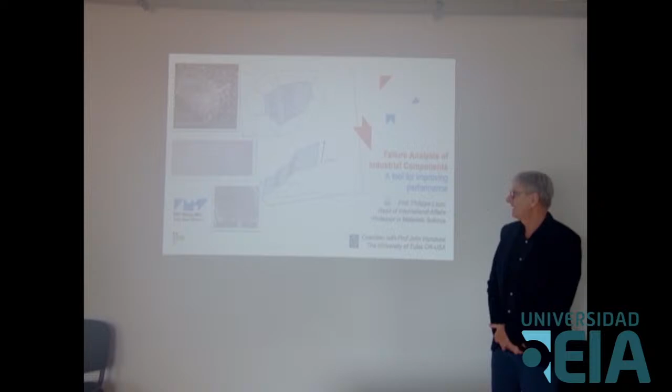I will do some lectures for students, and talk about our research activities tomorrow. Today I will give a general talk about failure analysis. This is a talk I prepared together with my colleague from the University of Tulsa in the USA, Professor John Henshaw, who I would like to thank for providing materials for this talk.

As an introduction, I would say that failure analysis of industrial components is a way to improve performance of parts in industry. We do failure analysis because we have to, because some parts break or fail during service, but also the idea behind this is to improve the parts we manufacture by proposing and recommending corrective actions. So we will go through this agenda.

After a general introduction, we will talk about the reasons why we do failure analysis, discussing statistics, which is very important in failure analysis. Some words about failure reporting, because when we do failure analysis we have to report what we find simply but factually — what we did and what we found — and again here the corrective action we recommend.

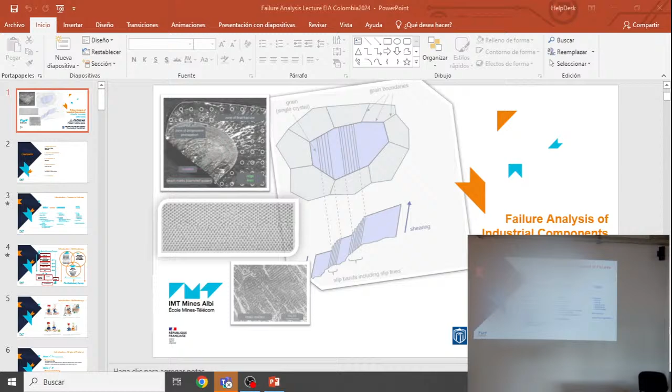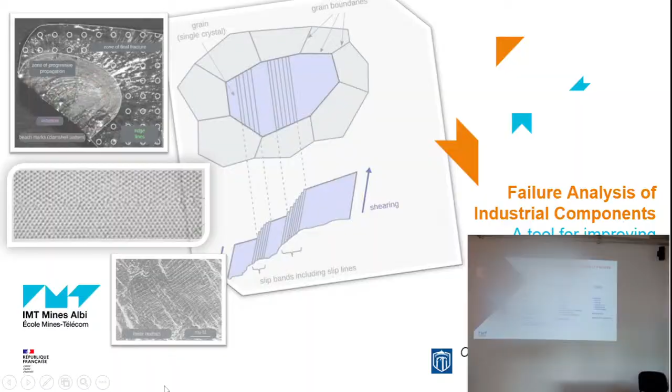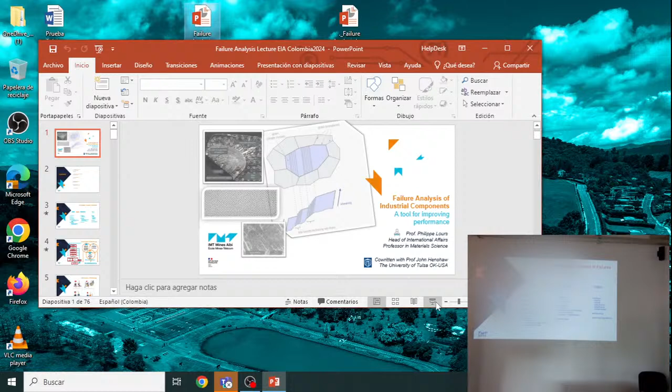People will be connected. Stop. Yeah, you can start again. I can start again? Sí, okay, so sorry for this interruption.

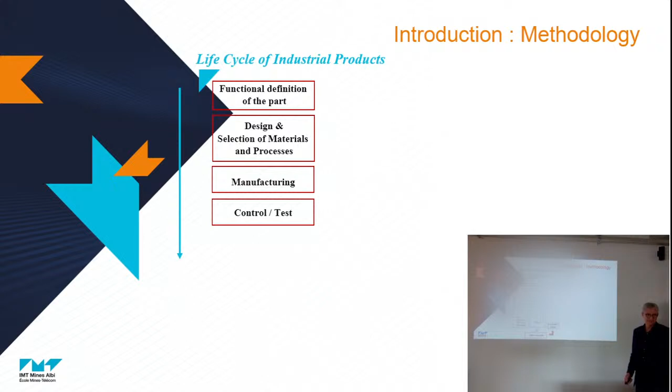I was talking about the different steps where the failure may find the root cause. So either in the design and selection of material and processes, manufacturing, control test, and of course use.

So what we have to do is a preliminary survey. This is what we can do when we have a broken part, and we have to gather general information. We have to look more thoroughly and precisely into the part, and then, if necessary, and only if necessary, we can do complementary exams.

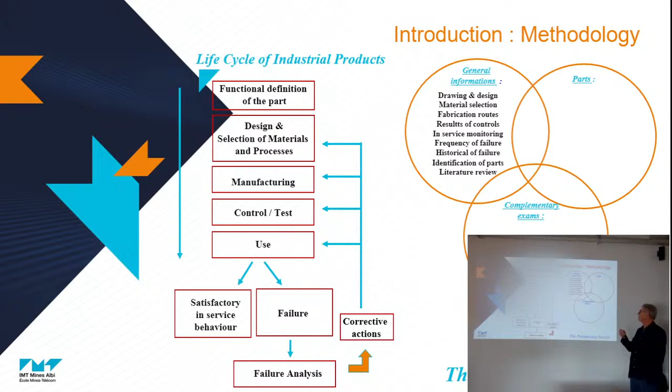So the general information relates to drawing, design, material selection, fabrication routes, results of control, in-service monitoring, frequency of the failure, historical of the failure, identification of part, why not literature review.

We can also make some reconstruction of parts, look to the aspects of the degradation, the fracture surface, and the related specimen fluids counterparts. With this, usually you can have a good idea of what happened, what occurred.

But if you don't understand really and perfectly the failure, you can do complementary tests or complementary exams, like metrology, chemical analysis, non-destructive testing, metallurgical analysis, microfractography, comparative tests, calculation, and simulation.

And when you have done all this, usually you don't do so much investigation, of course, because you don't have anything more to do. But if you do all this, generally speaking, you will have the most likely scenario of the failure.

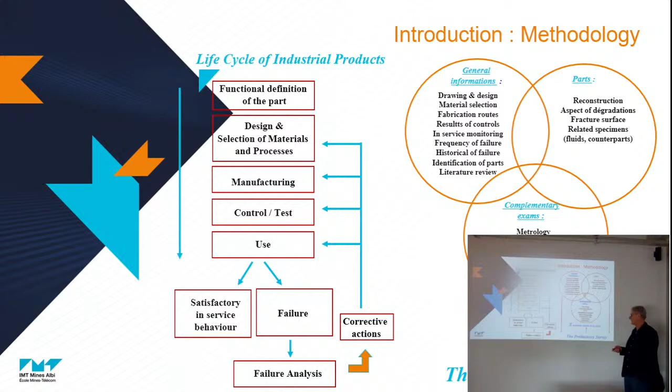The failure analysis is also a question of methodology. You have to be very thorough, and with a part you have to analyze. And this is very important, not to erase the aspects of degradation you have on the surface you are analyzing.

These are also statistics about the cause of failure on 1,000 analyses performed by this French organism. About more than one-third are due to fatigue, less than one-third are due to instantaneous fracture, 20% corrosion, 12% wear and abrasion, and a very low percentage due to in-service deformation without any failure.

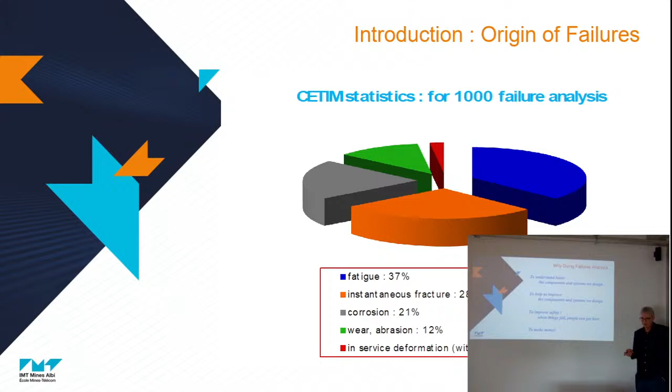So why doing failure analysis? To better understand our system and component, to improve the component and system we design, and also to improve safety. When things fail, people can get hurt. And of course, to save money or to make money, make profits.

So we have to wonder how long should a component last before it fails. Things break and stop working. Why? How long should a component last? This is our main question we have to wonder.

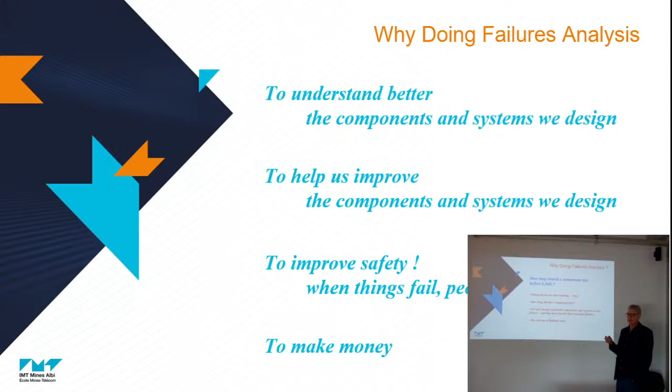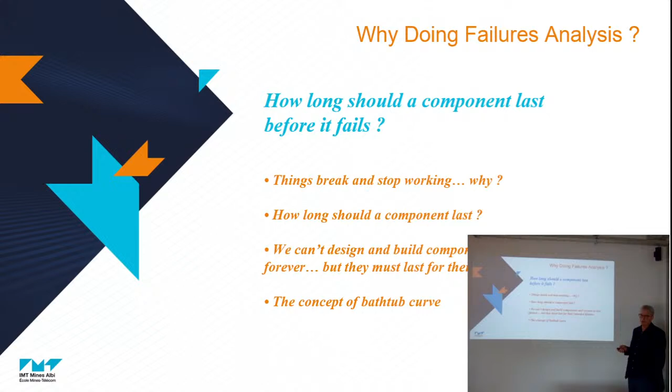We can't design and build components and systems to last forever, but they must last for their intended lifetime. I want to define here the concept of the bathtub curve. This is a curve where you can see, over time, the failure rate.

Usually when you manufacture parts, you have what we call infant mortality failure, early failure of a part due to mismanufacturing. This decreases over time. You also have wear-out failure due to use of material, and random constant failure. When you gather these three curves, you get the bathtub curve.

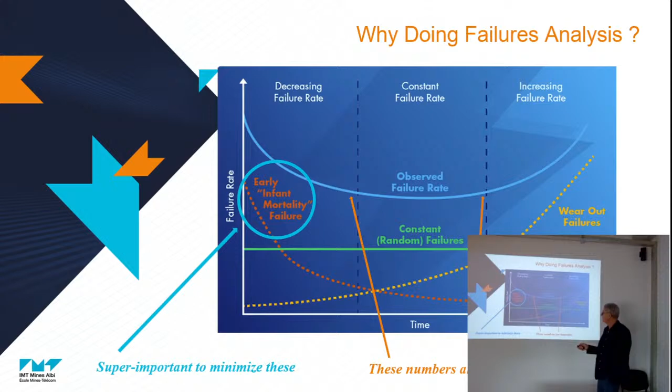It's very important to minimize this time to failure here, and also this number is very important to minimize the infant mortality failure. This is a common way to analyze a mechanism of failure, and when you do a failure analysis, you always have to wonder which part of the bathtub curve you are on.

Example of car tires: infant mortality failures are covered by warranty, very expensive for the manufacturer, usually due to a defective product. This is followed by a long period where failures are very rare. Then finally you have to change your tires because they wear out. So again, when you analyze a failed component, you always have to wonder where on the bathtub curve you are.

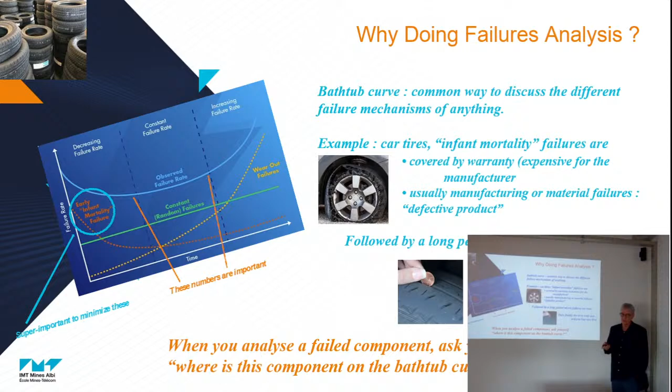It's also very important to do failure analysis and failure statistics. To understand failure, we must track failures over time, analyze each failure to find the root cause, and implement corrective action and projects to eliminate the most prevalent failure.

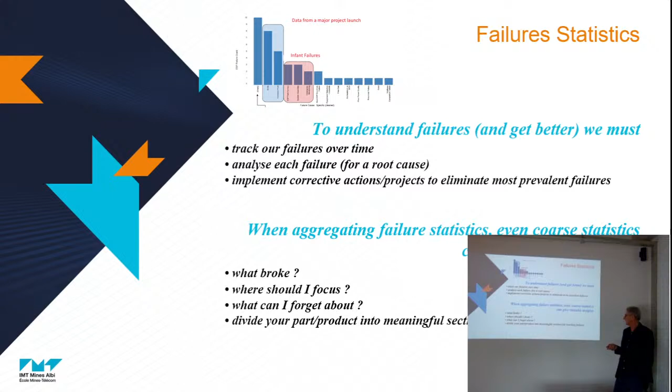When you aggregate failure statistics, even coarse statistics can give very interesting results. What broke? Where should I focus? What can I forget about? And divide the product into meaningful sections for tracking failures. This is very important as well.

Accumulating root cause information over an extended period of time is very important for continuously improving product quality. This helps understand if these are infant or long-term failures, and allows you to justify resources for corrective projects or corrective action.

Usually we use Pareto charts, given that 20% of causes may be the reason for 80% of the failures — this is Pareto analysis. So as a summary, I would say that analysis...

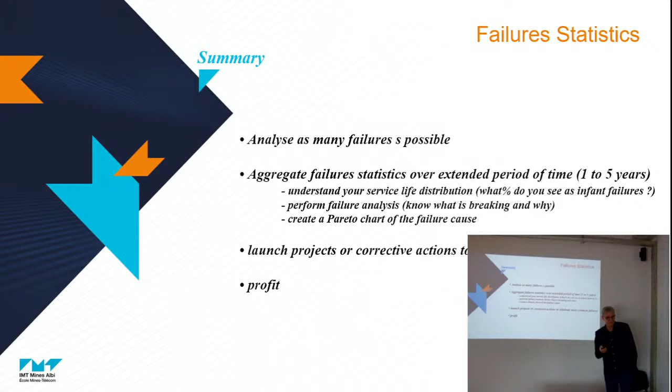You must analyze as many failures as possible, aggregate failure statistics over an extended period of time, let's say 1 to 5 years. Understand your service life distribution, what percentage of infant failure you have, perform failure analysis, and create a Pareto chart for failure cause or root cause. Launch projects for corrective action, and finally get profit in terms of financial benefit.

And you also have to report — this is very important. Failure is always someone's fault and always carries a cost, so you need to defend your conclusions. People can get hurt during failure; there are legal consequences and financial consequences. So you have to be complete, without any immaterial conclusion or evidence.

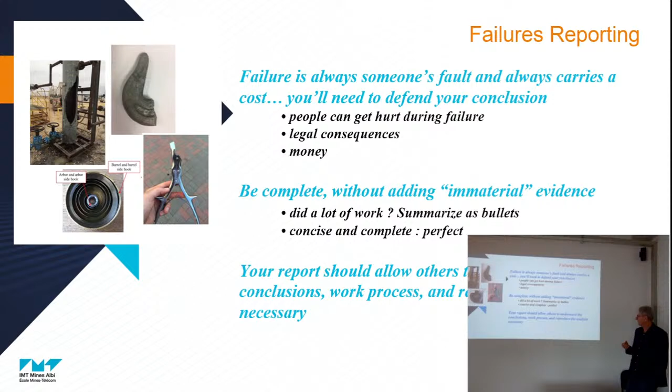You need a lot of work, of course, to do a failure analysis, so summarize it in bullet points. Be concise and complete, and your report should allow others to understand the conclusion, the work process, and reproduce the analysis if necessary.

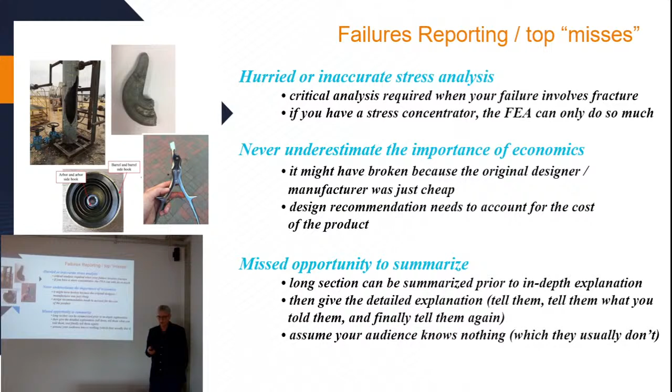These are the main top mistakes in failure analysis reports: hurried or inaccurate stress analysis, never underestimating the importance of economics, and missed opportunities to summarize. It's very important to go through these different points when you do a failure analysis report.

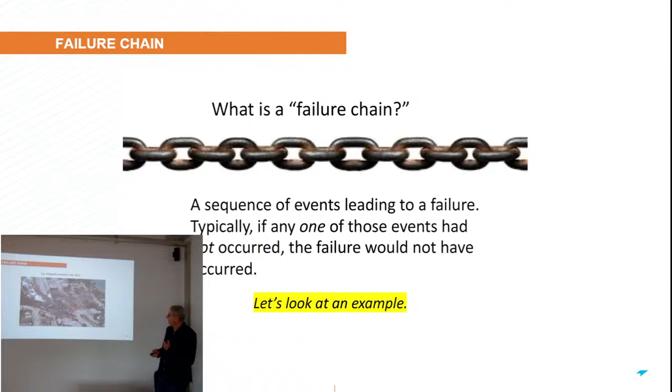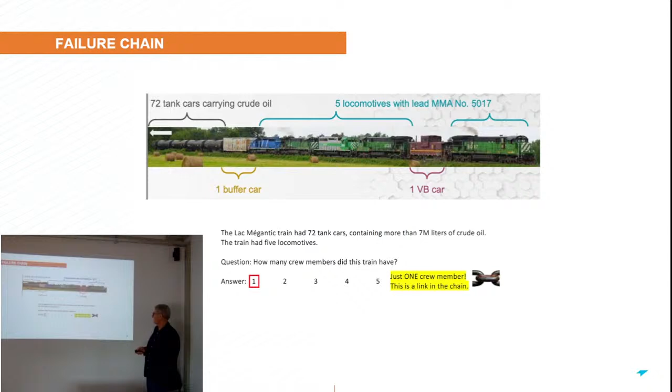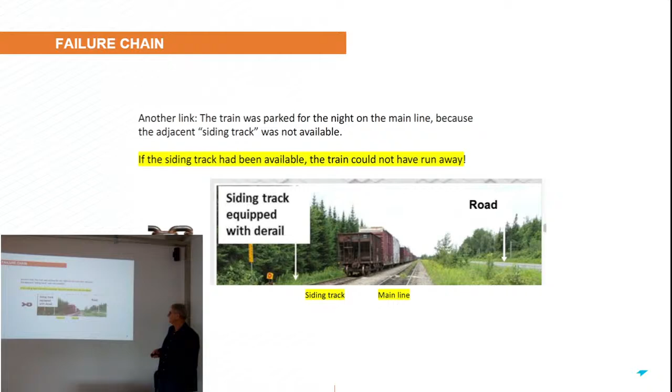Another link: to park the cars during the night, we should have used a siding track and not the main line. But in this case, the siding track equipped with a derail system was not available, so the train was kept on the main line. This is the second link.

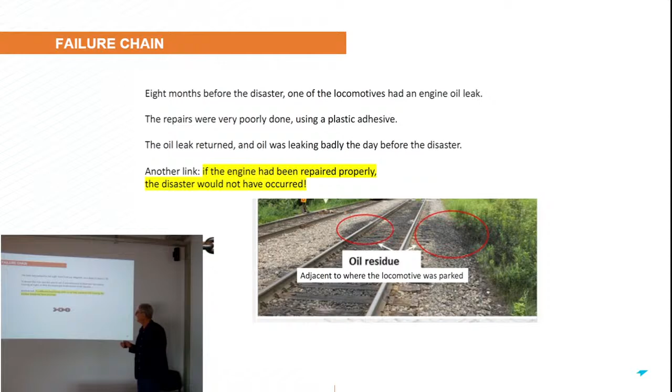The train was parked 15 kilometers from Lac Mégantic on a slope of about 0.7%. So to ensure the train would not roll, it was necessary to leave one locomotive running all night, so that the pneumatic brake system could operate.

The locomotive used was the locomotive with the oil leak. This is another link in the chain - if a different locomotive had been used, maybe there would have been no problem.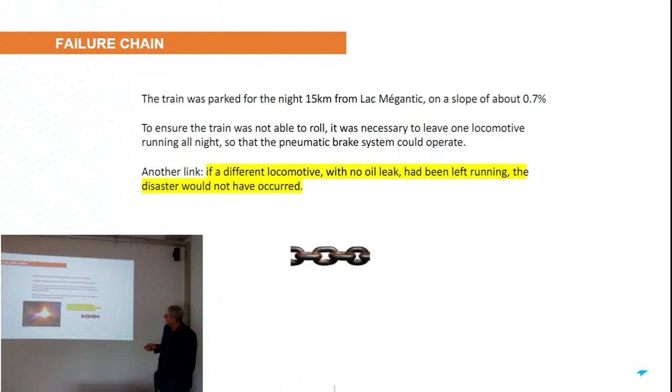So in the middle of the night, due to the oil leak, a fire caught near midnight. Firefighters extinguished the blaze after first shutting down the locomotive.

But they did not restart the engine of that locomotive or another one. So no more pneumatic brake was available.

And here we come back to the only one person in charge of the project, of the program of the train. This person had to manually put in operation the brakes of all the wagons.

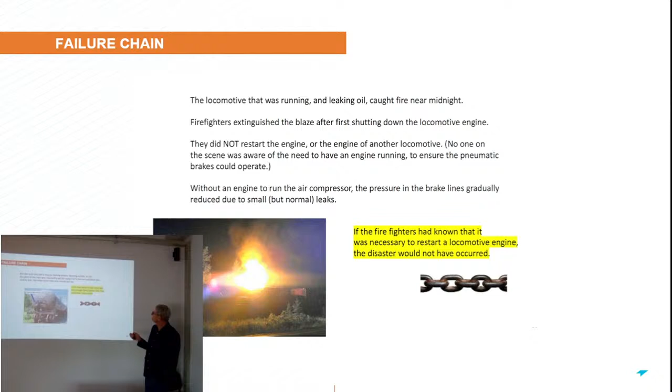So another link here, because there was no time to do that - it takes a very long time, something like 1 minute per car. You can see there were 72 cars plus 5 locomotives. Very long time to put the handbrake wheel in operation. So this is another link.

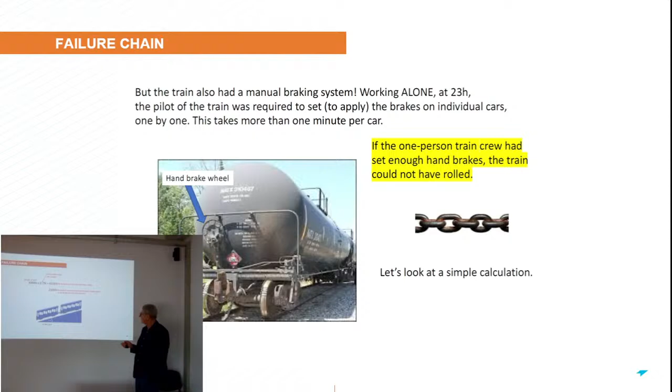And you can see for the slope, if you do a very simple calculation, we should provide a certain force for this slope to make the train stop. The estimated force applied by the handbrakes put in operation by the only one person in charge of the train is about 1/3 of the necessary force to make the train stop, to have the train not rolling. So very low force, very difficult.

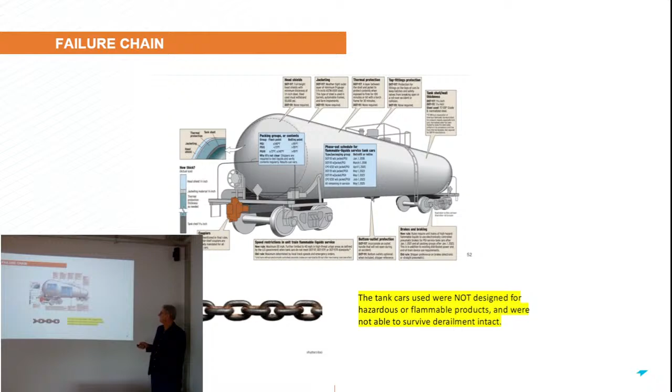Okay, and another link is that the tank cars used were not designed for hazardous or flammable product. So this is also a mis-choice in the quality of the tank cars in the train. So this was a disaster.

Some photos here. So you can see an illustration of what we call the failure chain - different steps or different problems that occurred at the same time or consequently to each other. So this was the disaster.

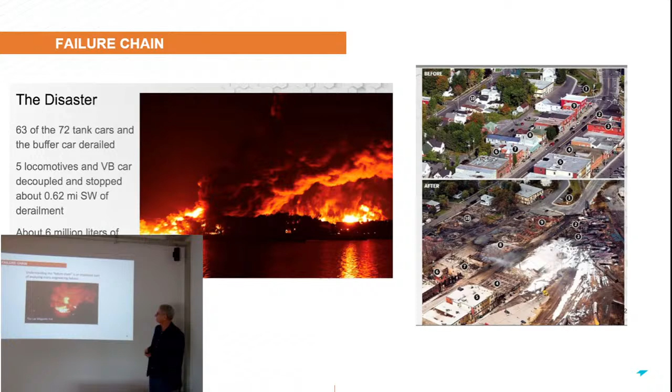Okay, so now going back to mechanics of materials, I would like to show you that the first thing is to perform what we call morphological analysis, where you look at the fracture surface of the material. The orientation of the fracture surface is related to the type of stress and the nature of the material. A very simple example here: in tension, when you load a ductile material, because the ductile material is sensitive to shear stress, you will have...

...a 45-degree surface failure with respect to the loading axis. Whereas for a brittle material, you will have a failure surface 90 degrees perpendicular to the loading axis, because brittle materials are more sensitive to normal stress than to shear stress.

If you do the same for torsion loading, the ductile material will show the fracture surface more or less perpendicular to the loading axis, whereas the brittle material will have a 45-degree surface failure to the loading axis. This is due to the nature of the material and the nature of the stress tensor in the material.

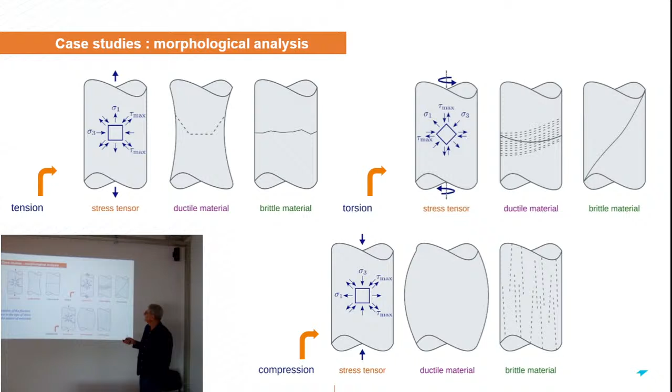So it is sometimes very easy, just by analyzing the orientation of the fracture surface with respect to the loading axis, to determine whether you have a brittle or a ductile material. Or if you know very well that you have a brittle or ductile material, you can consider critically the type of loading and get some information on it. So very interesting to just look with your eyes - no need of sophisticated equipment or sophisticated microscope to do that. Only your eyes can give very valuable information.

So the fracture in a material can be either transgranular, when the fracture surface crosses the grains of the material, or intergranular, when the fracture surface bypasses the grains. The intergranular failures are: brittle rupture by decohesion, creep rupture, corrosion rupture. And the transgranular fractures are: ductile rupture, brittle rupture by cleavage, or fatigue rupture.

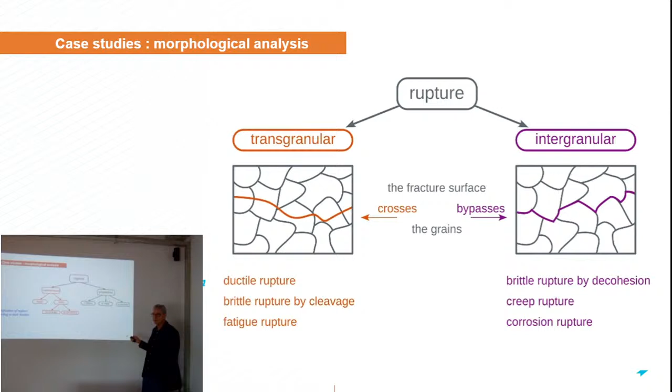You can also consider the fracture surface of materials by their observation or their kinetics. Fracture can be either instantaneous or progressive - instantaneous in the case of ductile or brittle by cleavage or by decohesion fracture, and progressive in the case of fatigue, creep, and corrosion as well. So this is interesting to check, either by the observation or by the kinetics of rupture, what type of rupture you have.

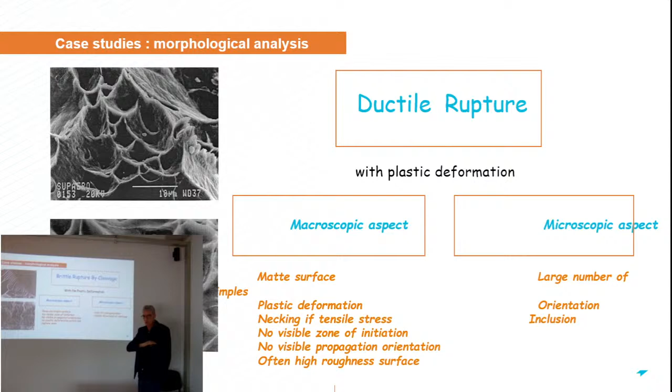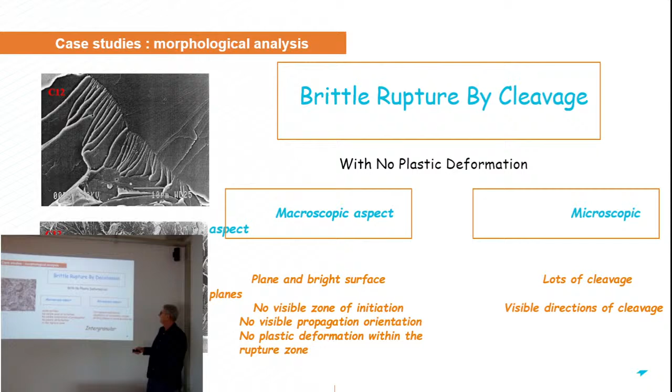At the microscopic scale, you can see that the fracture is intergranular, you can see pores, and you can also see vermiculates in oxidizing atmosphere as well.

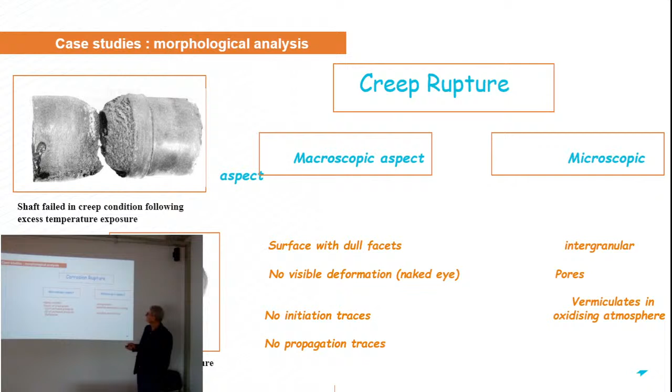Corrosion fracture is highly variable. You can see traces of oxidation, of corrosion products, and here also, in some cases, for example in aluminum alloys, you can see some exfoliation as well.

The microscopic aspect reveals that the fracture is intergranular, and you can see possible secondary cracking as well, and possible ramification due to the corrosion, intergranular corrosion in planes making an angle with the main fracture surface.

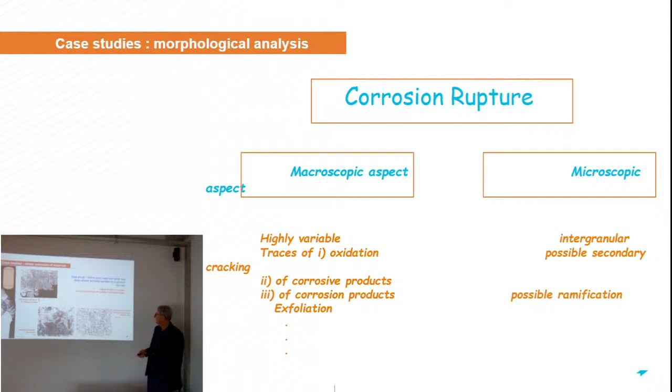This is the first example I wanted to show you. This is a case study we did with our student, the case of a nitric acid reservoir with two deep drawn bottoms and a central ferrule here.

You can see here the damage at the bottom of the reservoir, and here the welding between the ferrule and the bottom. The material is stainless steel, with a very typical stainless steel microstructure. This is an optical micrograph of the part, and here you have the damaged area, somewhere here.

You can see very simply that the failure is due to some corrosion, and at higher magnification of the damaged part, you can see that the corrosion is intergranular, which is often the case, and you can see slip traces within the metallurgical grains of the material.

These slip traces are probably due to some deformation in the material. This is the part that was deep drawn, and usually when you deep draw a part, you do that at low temperature, at room temperature, so you have to make a heat treatment afterwards to release the stress.

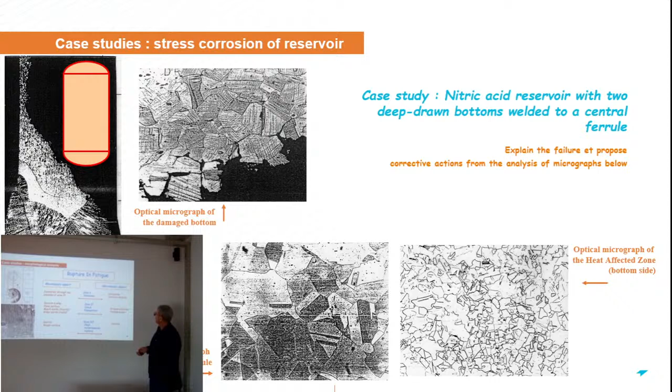Cases of fatigue are very interesting to analyze because the fracture surface is usually very typical. You can see three zones, or simply two zones: the first zone where the surface is smooth and silky, and the second zone where the surface is very rough.

When you consider these two zones, by analyzing the zone of crack propagation, you can find the third zone, where the crack initiates. On this part, the zone where the crack propagates after its initiation on the defect, you can see beach marks, frontal marks, and ridge marks, which are radial marks.

And if you go here to the final fracture, you have a fracture which is ductile, and you have a rough surface.

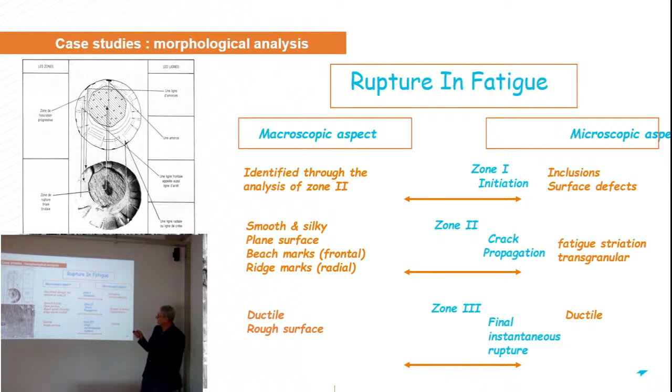This gives valuable information on the level of stress and the resistance of the material. And if you go to the first zone, probably with this microscopic approach, you can get information about the initiation, either some metallurgical defect like inclusion or a surface defect due to, for example, machining of the material. So it's very interesting to analyze fracture surfaces in fatigue.

I'll give you an example where you consider the fatigue or fracture mechanics of material: the failure analysis of a beverage can. You can see that this can has failed, and when we analyze the problem, we can see that we have some corrosion on the inside part of the can. The corroded area was long and slender, and the corrosion was probably a result of a defective internal coating.

Let's have a look at the economic aspect. One rupture in 1 million cans can be okay for the aluminum can industry. In the US, about 100 billion cans are produced per year, so one rupture in 1 million makes 100,000 fractures per year. For the aluminum industry, at least in the USA, aluminum beverage cans are more important than airplanes or cars. Given this number of cans and this weight for each can, this is about 1.5 times 10 to the 9 kilograms of aluminum per year to manufacture.

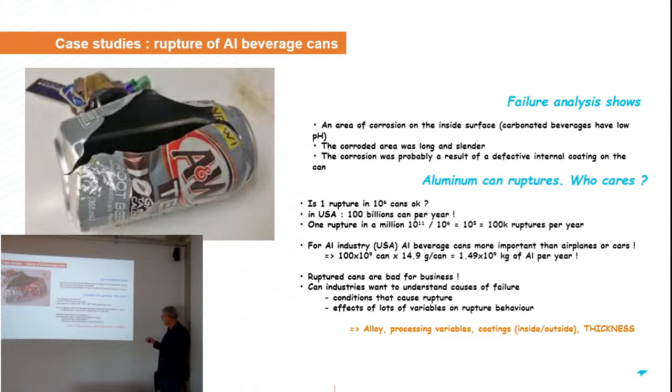But let's have a look at the thickness. Usually the nominal thickness is about 100 micrometers. If you look at the manufacturing cost for making the can, it's about $0.05, and the beverage inside is about $0.01. So about 80% of the cost is due to the material and not to the beverage you put inside. So this is very important.

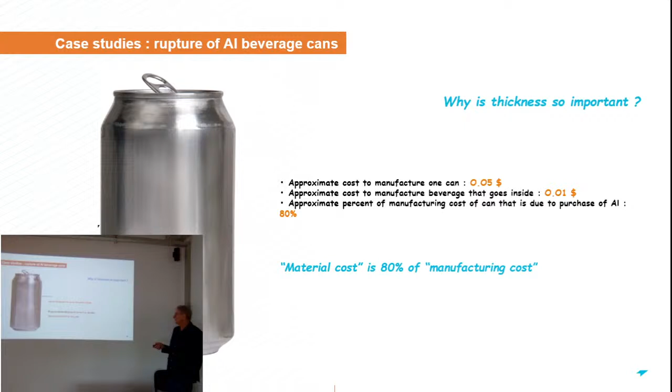If you reduce the thickness from 100 micrometers to 99 micrometers, you can save tens of millions of dollars. So it's very important to look at this parameter for saving money.

But if you reduce the thickness, maybe you make fracture more likely. So here we are in the case of the fracture mechanics approach, and no longer the material strength approach where you compare the applied stress to the yield strength of the material. Simply, in the case of fracture mechanics, you have to consider the applied stress and compare it to the crack size - the size of the possible crack in the material - and the toughness of the material. This is a little bit more complex.

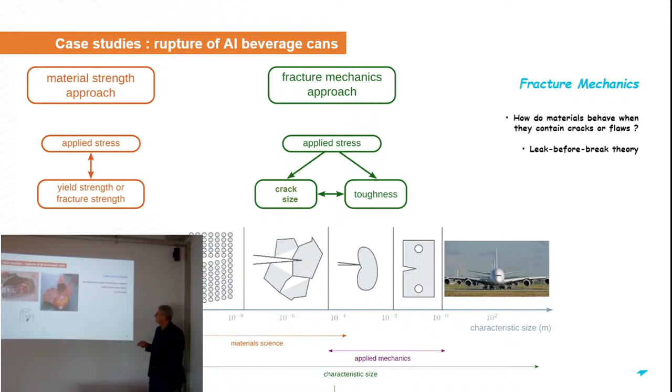So we will do an analysis on the leak-before-break theory. It's always better to have a leak than a break or an explosion. And what controls leak versus break?

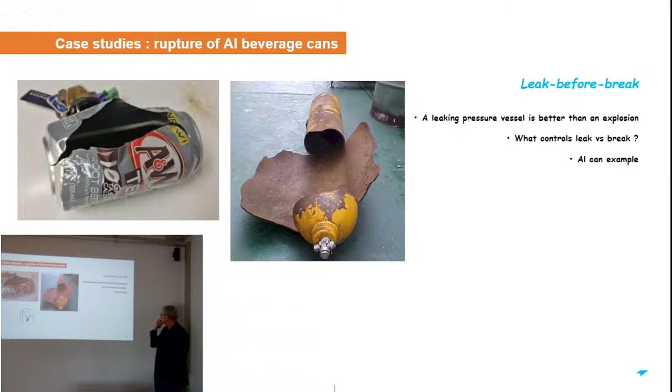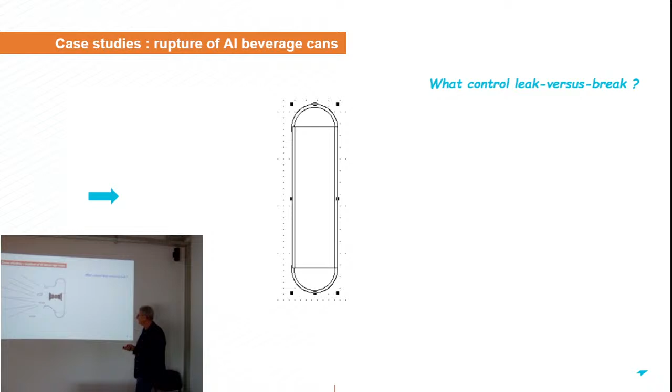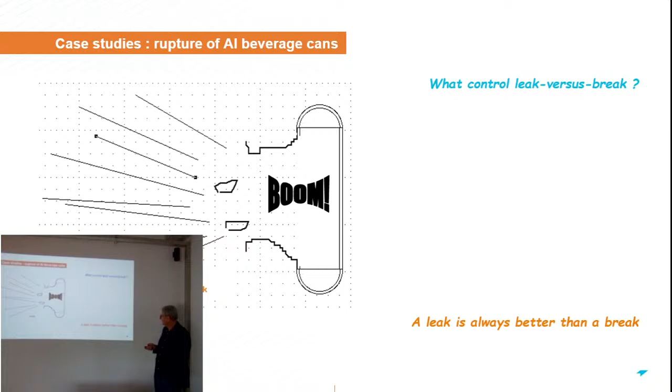We have this aluminum can example here. You can see a leak, not so much a problem, and you can see an explosion, a much more severe problem. So, as I said before, a leak is always better than a break. So what controls this leak versus break?

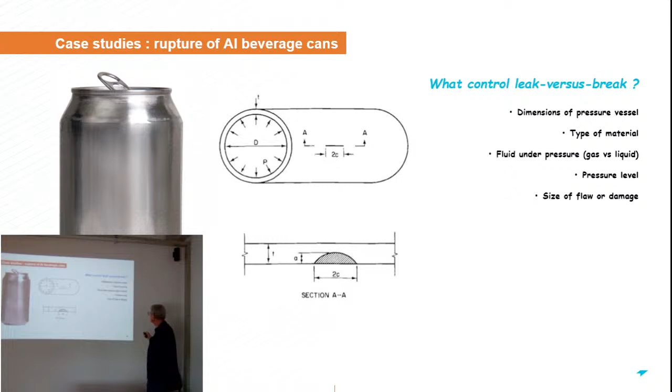The dimension of the pressure vessel, of course, the type of material, the fluid under pressure, the pressure level, and the size of the flaw or damage. So we will focus on this and this.

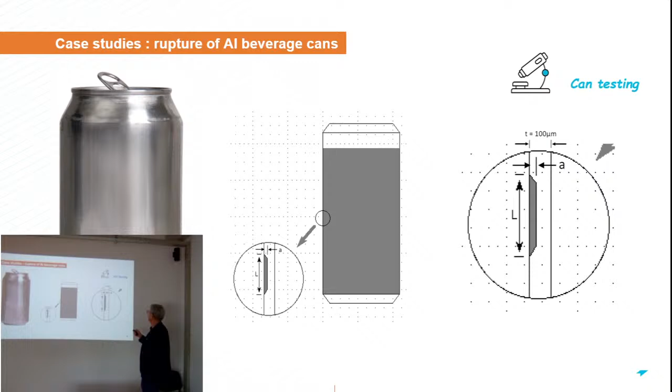Let's have a look at this parameter. Let's say we have a flaw or a defect at the external surface of the can, with this length and this depth here, L and A. The thickness is 100 micrometers, as I said before.

So what we do here is increase the pressure in the can, in the reservoir, and try to find when the crack propagates through. Here we have to consider what we call the stress intensity factor. When you apply stress on a material containing a defect of size A, you get a stress intensity factor, expressed as the applied stress times a geometrical constant times the square root of the size of the flaw. If the stress intensity factor is lower than the toughness of the material, you have a leak. If the stress intensity factor is greater than the toughness of the material, you have a break.

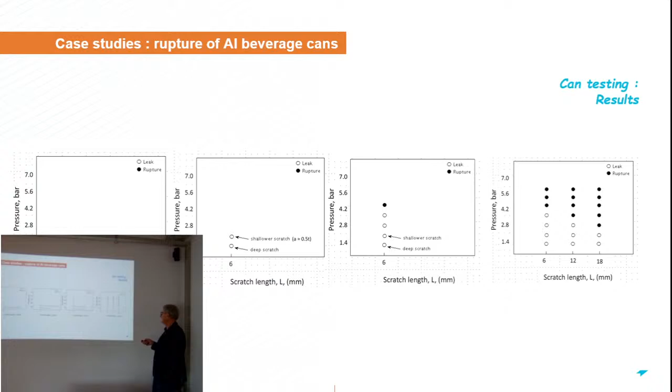Then we did this test for different scratch lengths, increasing from 6 millimeters to 12 and 18, repeating the same test by increasing the internal pressure. You can see that we could discriminate two domains: leak below and rupture above this line here. Below, the stress intensity factor is lower than the toughness of the material; above, it is higher than the toughness of the material.

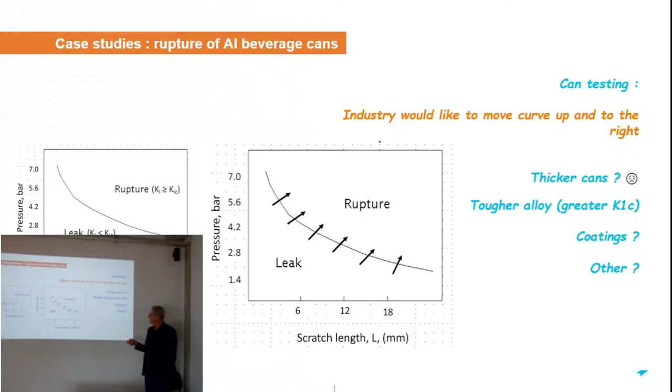What we want to do is move this curve to the right and up. So what can we do to move this curve up and right? We discussed before the problem of increasing or decreasing the thickness of the can. Make the can with a material of higher toughness, a tougher alloy. Or put some coating or solution. This is a very interesting, very simple study to address the problem of material or design of the part, to avoid or limit as much as possible the fracture of the can.

Starting from this, you can, for a given pressure, define a critical length of defect. For this pressure in the can, you have a critical crack length of about maybe 7 millimeters. Below this, no problems; above this, you can have problems.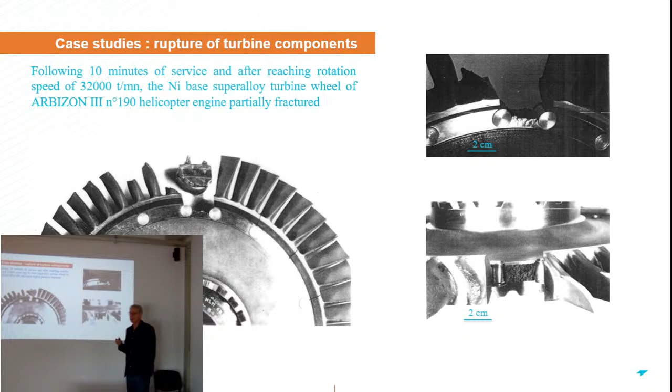So you can see here a very rapid failure, meaning there was probably not enough time for fatigue of the material. Close to the fracture, you can see some plastic deformation, and on the fracture surface itself you don't discriminate two zones. So probably no fatigue here, only an instantaneous fracture occurring very, very quickly. This is what we call a ductile fracture, because you find some plastic deformation and an instantaneous fracture, not related to any fatigue of the material.

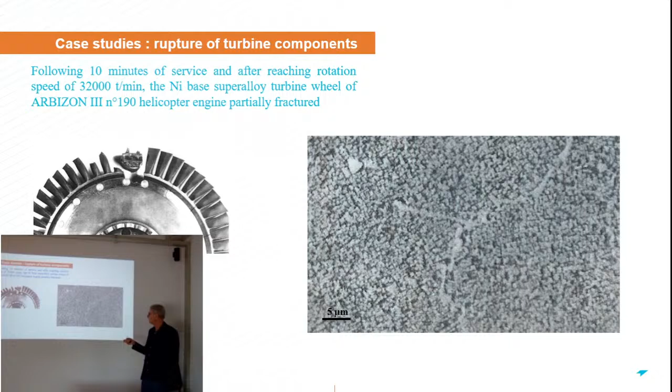If you go more deeply in the analysis, you can see quite nice microphotography of the material, and on this micrograph a very typical gamma prime microstructure, a two-phase microstructure very typical of nickel-based superalloy. So the material, in terms of its microstructure or phase structure, is okay.

But if you go more deeply in the analysis, you can find what we call micro-porosity. You can get in the microstructure of the material a lot of pores, as you can see here, with this analysis evidencing the presence of pores, and here the scale. You can find in the material a lot of defects due to manufacturing. When the part was produced using casting processing, the casting was not perfectly performed, and you got casting defects in the material, leading to the presence of preferential cracks at the tip of this metallurgical defect. This occurs very quickly because you get a lot of foundry or casting defects in the material. So this is a case of ductile instantaneous fracture due to a metallurgical defect resulting from bad manufacturing, bad casting material.

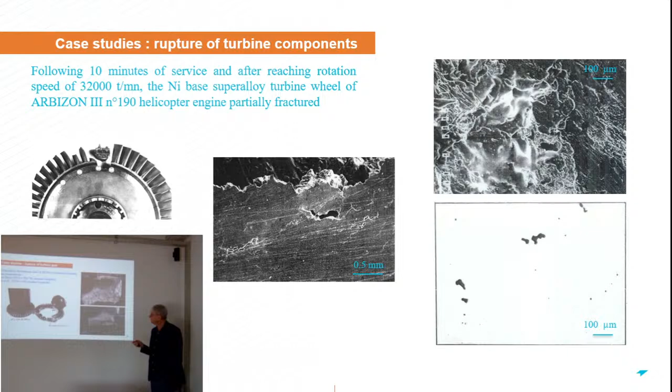Another example here: the material is a nickel-chromium-molybdenum steel grade, which is okay in terms of standard compliance, and on which we did hardness measurements. On the flanks, we got about 700 to 720 Vickers, which is okay.

In bulk, we get 430, which is also okay in terms of standard compliance. The material is harder at the surface than in the bulk because here you have a turbine gear, and you must be very hard at the surface due to the mode of loading and contact between the two parts.

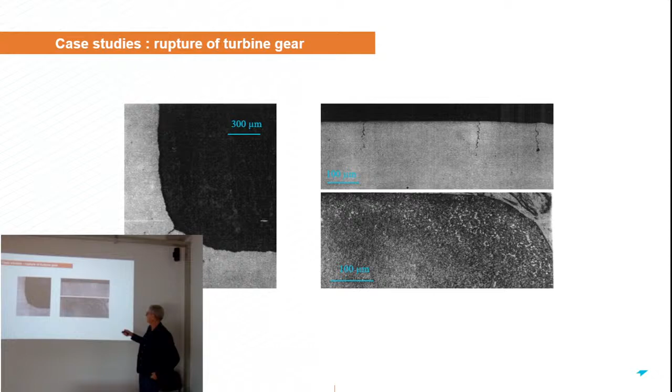I'll show you the last example here, which is the fracture of turbine blades on the first stage of a helicopter turbo engine, again, and the damage occurred after 972 cycles, about 547 hours. The analysis of the material showed that the grade is Inconel 100, which is okay with us in terms of standard compliance.

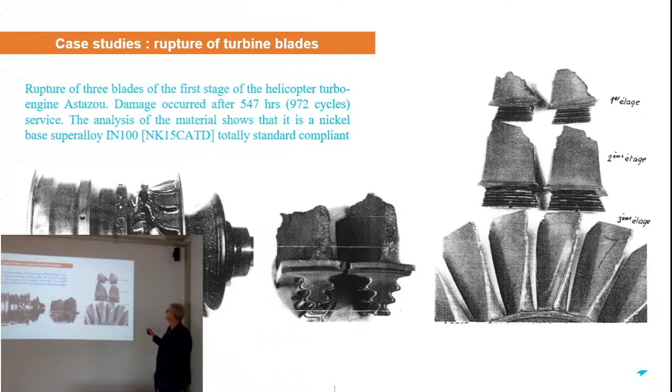So you can see here the fracture of the first stage blades, and you can see also that after fracturing, those blades damaged the second stage as well as the third stage. So all stages are damaged, but the root cause was the first stage blade fracture.

Again, here a very nice micrograph showing the typical gamma prime microstructure of the nickel-based superalloy. No problem with the material here.

And here you can see again the two-domain fracture surface, very typical of a fatigue fracture surface, with an initiation here, a propagation through this zone, and then the final fracture here. You can see about the same thing here and about the same thing here. So fatigue again here.

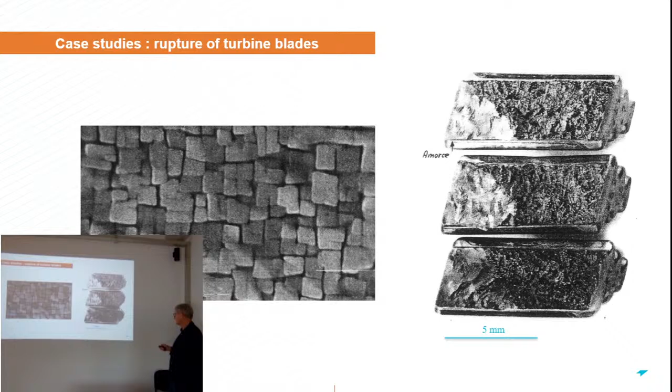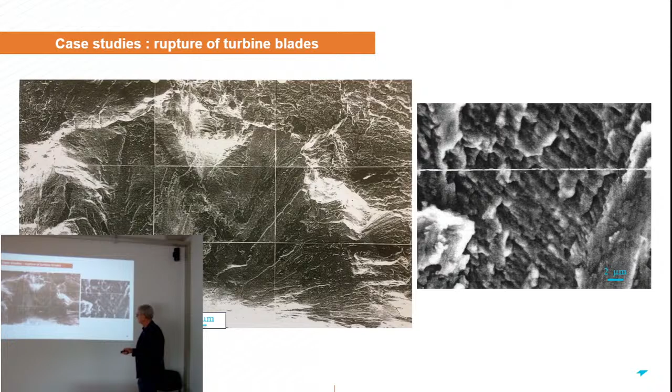When we did the analysis of this, we have a higher magnification image here of the fracture zone, where you can see mostly the zone where the crack propagates prior to the final fracture, which is here. When we do the measurement, this zone of crack propagation is about this length.

Considering the number of cycles, which was about 972, we can determine using the measurement of the fatigue zone what we call the interstriation distance, characteristic of each cycle. We found something like 3.5 micrometers.

And here you can see a micrograph of the zone, a very high magnification of some part in the fatigue zone, and you can see the fatigue striations, characteristic of the crack propagation during fatigue.

If you go back to the measurement, and consider the interstriation length calculated here with this microscopic view of the damaged material, we should have only 6 striations over this length, about 22 micrometers. Obviously we have much more than 6 striations here - maybe 1, 2, 3, 4, 5, 6, 7, and if you continue, maybe 20 or 25 striations here.

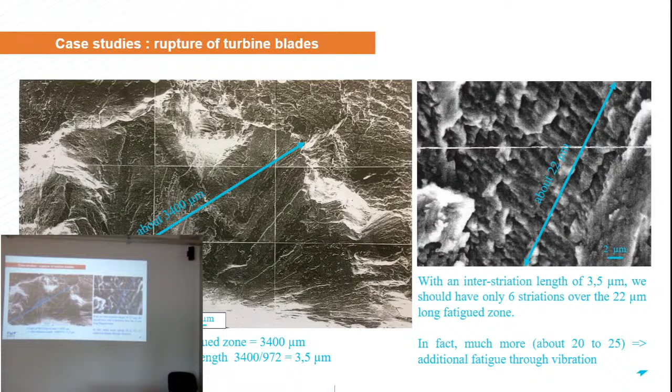It's very strange to talk with nobody, or only 3 persons. Reminds me of the days of the opera.